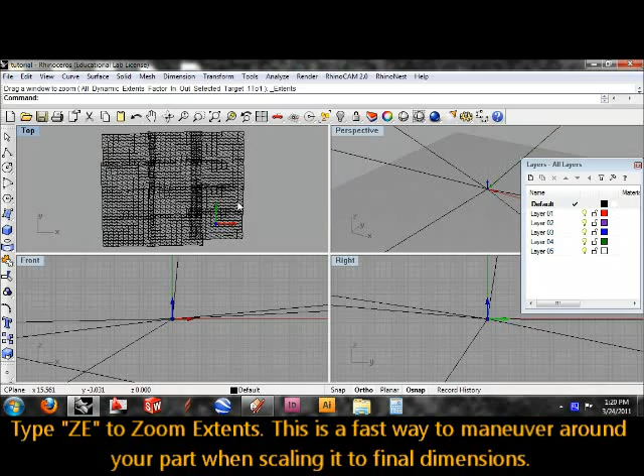So click open, and you can see it's huge. It doesn't even fit in my viewport, so I'm going to type ZE, and I'm going to maximize the top viewport so that I can maneuver a little more easily. I'm going to make a rectangle, and this rectangle is going to serve as a guide for when I scale my meshes. And I'm going to select everything, and I'm going to scale.

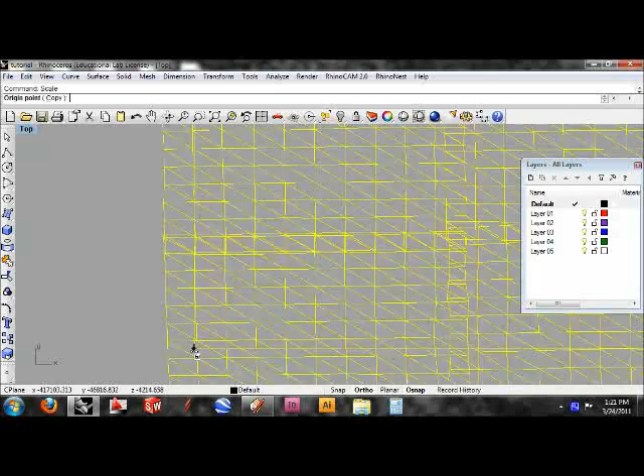I'll choose one corner of my rectangle as the origin, and I will snap to an adjacent corner on the rectangle. And I'm going to scale this down so that my rectangle is 36 inches because that's the size I want my finished product to be. I'm going to zoom extents again, and here it is.

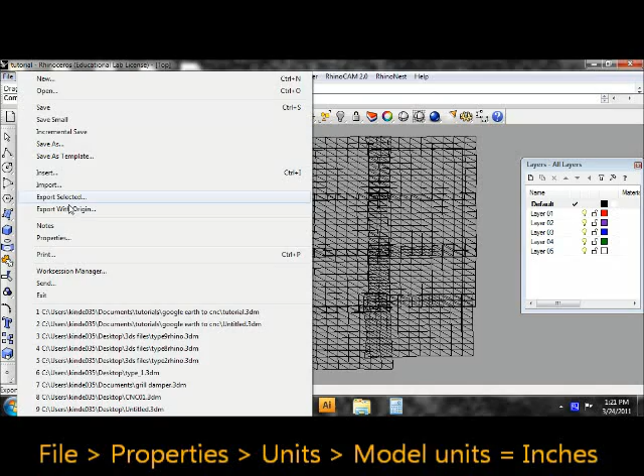So before we go any further, let's double check. Click on properties, and we'll click on units, and we're going to make sure that we're in inches and not millimeters. We need to be in inches in order to use the CNC. Now we're going to move all of this to 0. So type in 0, and here we are. So you can see that the corner of my rectangle is at x0, y0, z0.

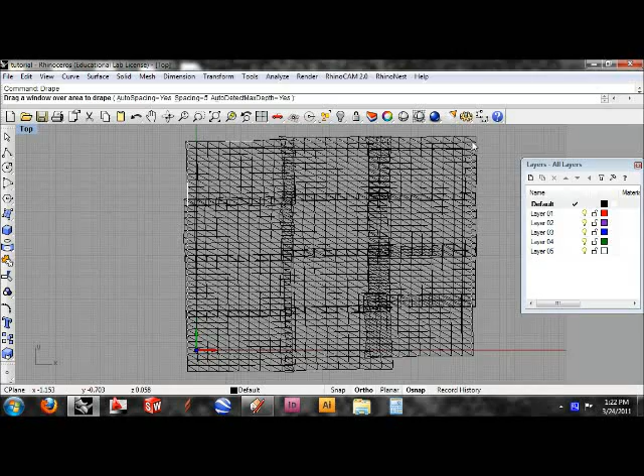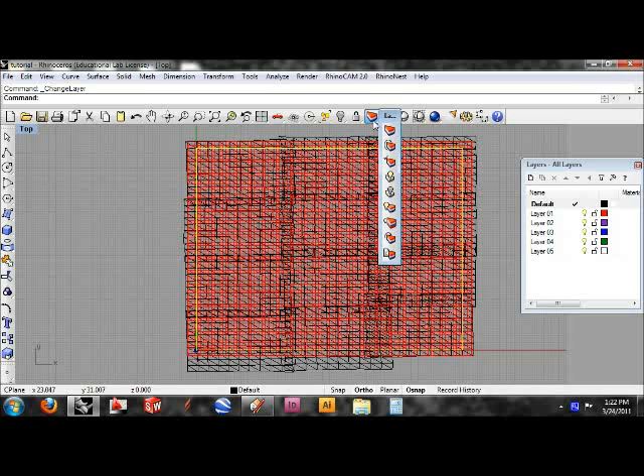So I'm going to drape over this, and my spacing is at 5. Start down here in this corner, go up to the opposite corner, and here's my drape. I found that drapes look better than the meshes that come in from SketchUp. I'm going to move this draped mesh to layer 1. You can see here it's red. It'll help keep things clean, and I'll be able to differentiate between other things that are going on here.

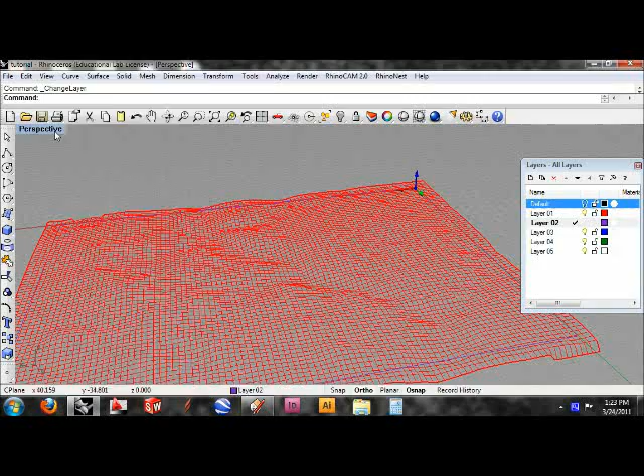I'll move that rectangle that I drew to layer 2. That's purple. And I'm going to shut off the mesh that I got from SketchUp. So here we go. We'll open up perspective, and you can see that I have my new mesh that I got from draping, and it's actually less faceted than the Google SketchUp mesh. There are still some facets you can see, but it's a lot better.

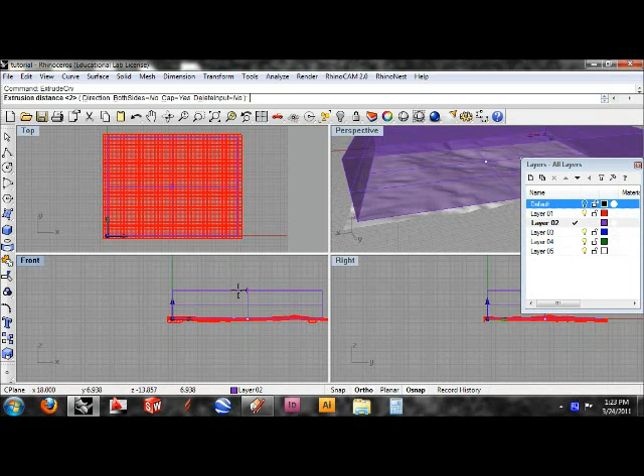Okay, so I'm going to take this curve, and I'm going to extrude it to make a box. And this box is going to be taller than my highest Z here, so I'll do 2 inches. And now I'm going to move this giant box down a little bit so that all of my Z-axis is encompassed within it. The purpose of this box is to serve as a cutting tool, because we're going to trim this. If you remember, our mesh is actually bigger than 36, so I'm going to trim everything outside of this box. There we go.

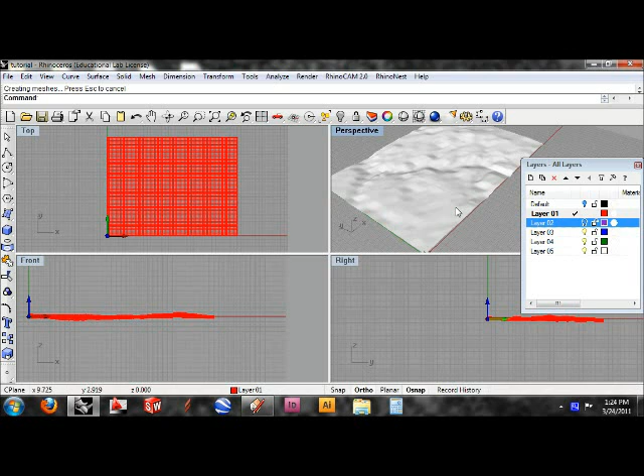Click on layer 1, and we'll hide layer 2 so the box is gone. There we go. This is my model, and it's at 1:1 on the CNC right now. So I'm going to open up the machine operations browser and the cutting tools browser in RhinoCAM. And if you look here underneath the tools, there's nothing.

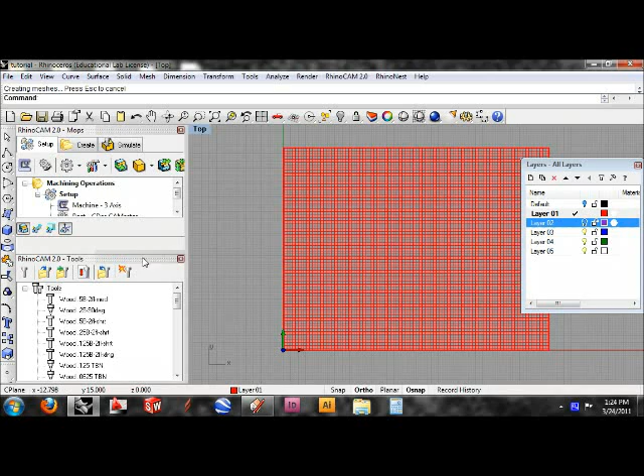So I'm going to load the tool library, and our tool library is saved as a VKB file, not CSV. So we'll open that up, and here we go. We have 35 tools. We'll go ahead and close our cutting tools browser, and our next step is to set up our stock. So we'll double click stock, and we'll go down and copy model bounding box, and this is going to make a stock box that is equal to the extents of our model.

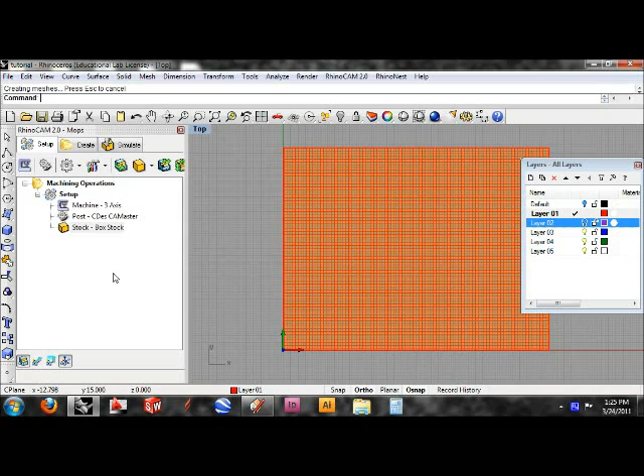But since I know that the stock that I have glued up already is 2 inches thick, I'm going to change the H to 2. Click OK, and our next step is to locate the WCS. And this is basically 0 for our part so that the CNC knows where to go. We'll set it to the highest Z and southwest corner.

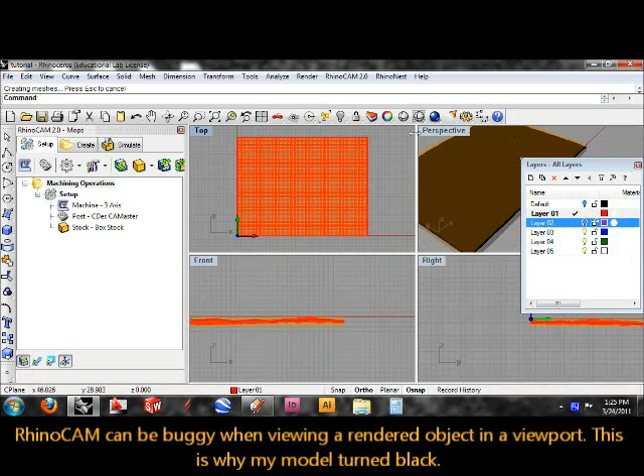And click OK. And now we will align part and stock. And this will make sure that our part is at the top of the stock and in the middle. Click OK. I'll maximize the perspective viewport. And you can see here how our part is completely encompassed in the stock. That's good, that's what we want.

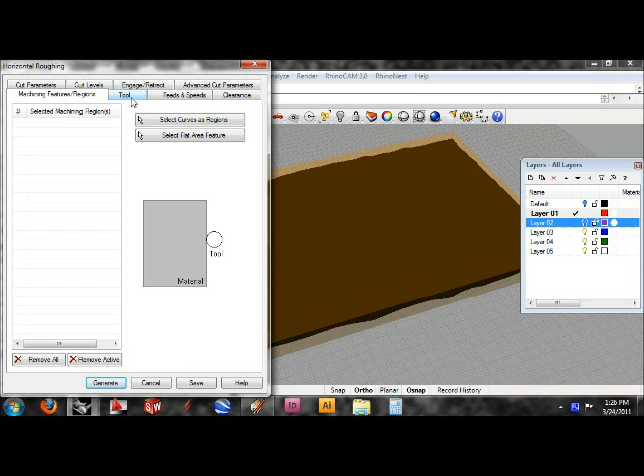Our next step is to create a toolpath, so we'll click the Create tab, and we're going to make a 3-axis toolpath. We're going to do horizontal roughing, so we'll click that, and we're going to select our tool. Our tool is going to be a 3/4 inch upcut end mill. Here it is. We'll click on Feeds and Speeds. We'll load those from Tool, and next we'll click on Cut Parameters.

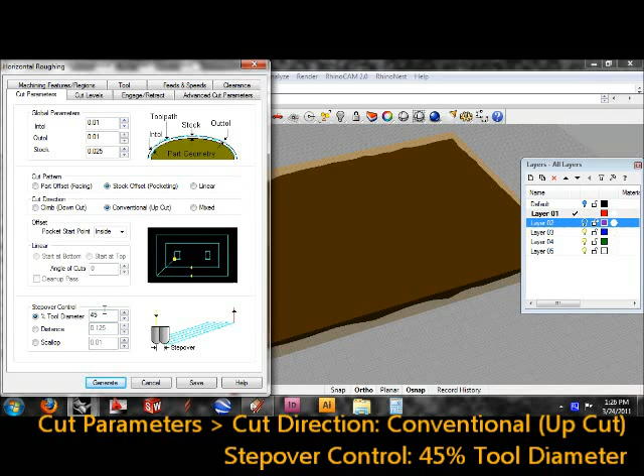For the most part, these settings are okay, but we're just going to change a few things. We're going to change the cut direction so that it's conventional, and then we're going to go down and change the step over control so that it's at 45%. This will make our cut times faster. The rest of these tabs are fine. You don't have to change the default settings. I tend to change the cut arc fitting and smooth cut transitions under advanced, but you don't need to. So click Generate, and there we go.

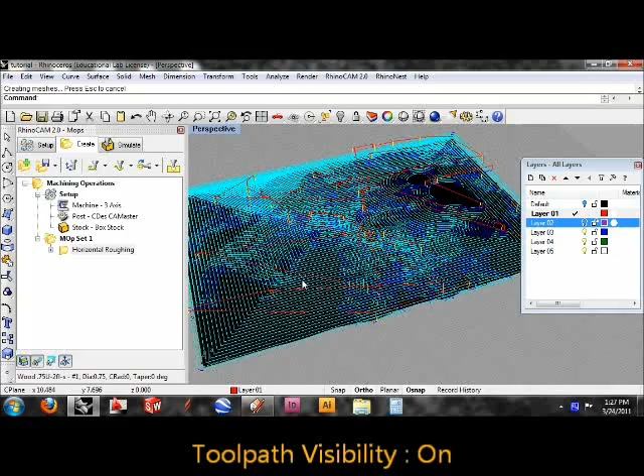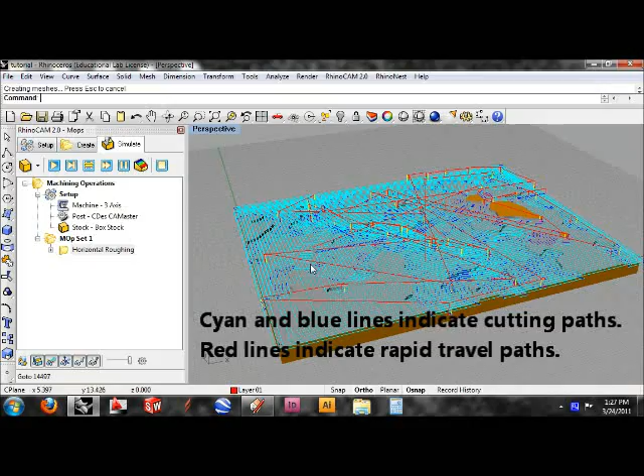Let's make sure the toolpaths are visible here. So all these blue lines represent where the center of the end mill is going to go. So we'll click on Simulate, go down and select our toolpath and hit Simulate. This shows us exactly what the CNC is going to do and what our stock is going to look like. And we'll just double check this to make sure that we're not going outside of our box too far, or we're not cutting someplace we don't intend to.

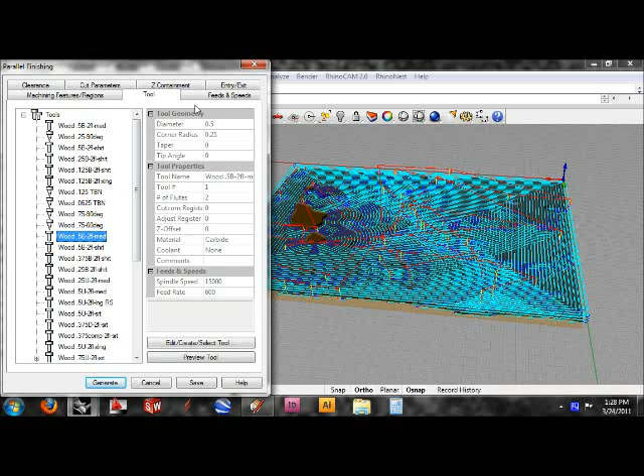That looks good. So let's click Create, and we're going to make another 3-axis toolpath called Parallel Finishing. We'll go up and select a tool, and for this we're going to use a 1/2 inch ball nose, the 0.5B. We'll click on Feeds and Speeds. We'll load those from Tool. Click on Cut Parameters, and here we're going to leave everything except for the cut control. Actually, we'll put the cut control back at mixed. It'll make it cut faster.

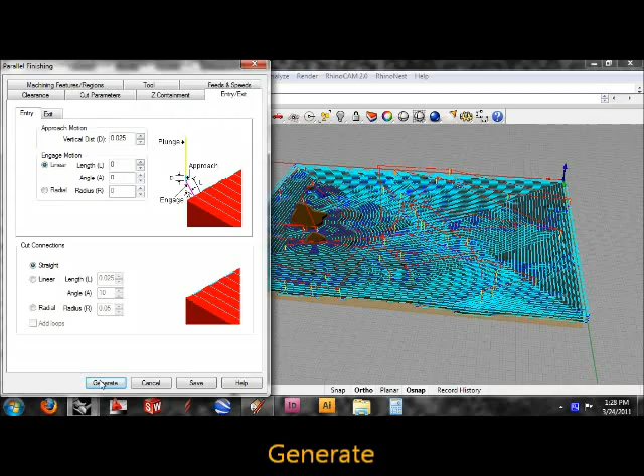We'll change our step over to 30%, which will make for a faster toolpath. And we'll click Generate. And here we go. You can see all the blue lines again. This is where the center of our cutter is going to go. There are a lot of lines, so generally that means that this is going to take quite a while to run. Again, we'll simulate this toolpath.

This toolpath actually took about 8 minutes or so to simulate, which is quite a long time for a toolpath simulation. So if I were to estimate the runtime on the CNC, I'd say maybe an hour and a half or 2 hours. It's really hard to tell. It's more of an art than a science, determining how long the runtime is going to be.

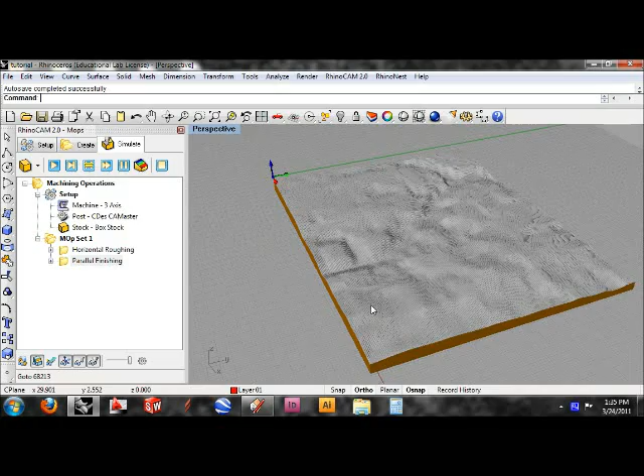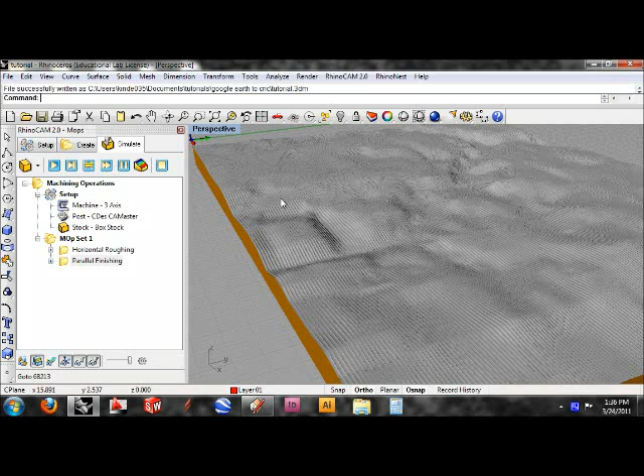Let's go ahead and take a look at the quality of our surface finish. You can see it's not too faceted, but it is fairly scalloped. And if you didn't want so much scalloping on your part, you could either use a smaller diameter ball nose end mill, or you could decrease your step over, say to 20% maybe. But then again, it's going to lead to a longer runtime by decreasing your step over. Let's go ahead and save this, and now your file is ready to be reviewed by